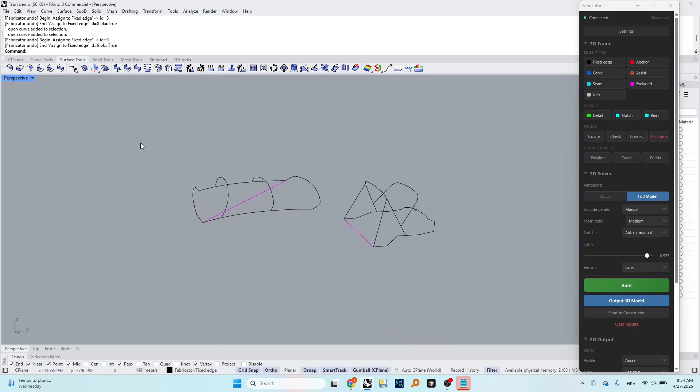Hi everyone, we're going to do another video about wireframes, and this one we're going to use the models that we are familiar with. This is a Bimini and this is a sprayhood. These are not completely done wireframes and you will see why. Well, maybe, some yes, some no.

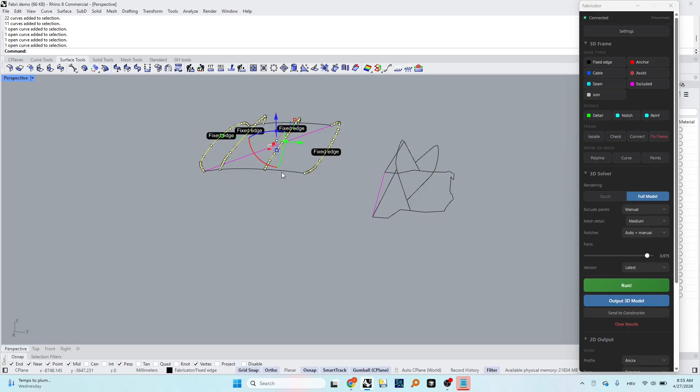You will see for Bimini we have everything made out of fixed edges, which can be done like this. So we have our tubes, these are already seams that are correctly measured on the position where the seams need to be. These are fixed edges, and the sides we also made as fixed edges. So if we run this, yeah, we have this one.

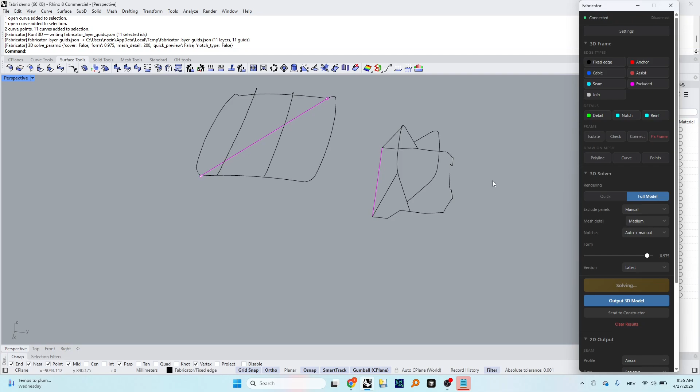The excluded loop would be the bottom loop going all around here. So the bottom one would be the one that we do want to exclude. Let's try to run this, see what we have. Running on medium settings, full model, and we're getting already some result.

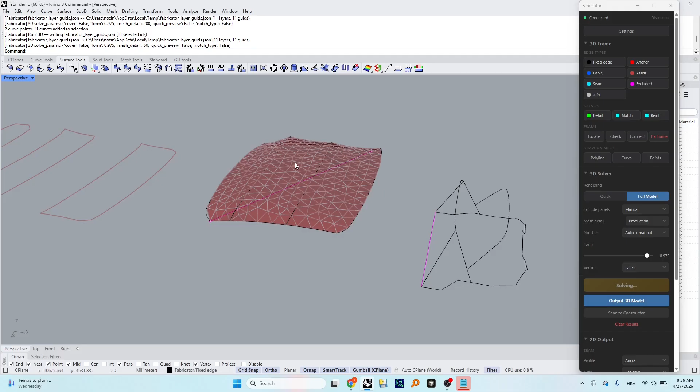Here you can notice that there is a gap, but if you increase the settings, you will get a much better result. So let's put it now to production just to see how it goes. And we wait a little bit longer because it's longer to process on high resolution. And now you can see the model coming out, and this is a decent Bimini.

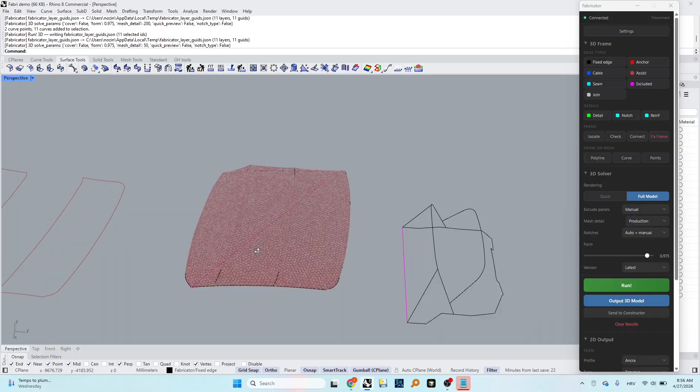You will see a little bit of folding also, settings as default. And here, sides, this is pretty good. It would probably work as it is right now. The panels are out already. Yeah, so nothing wrong with this one.

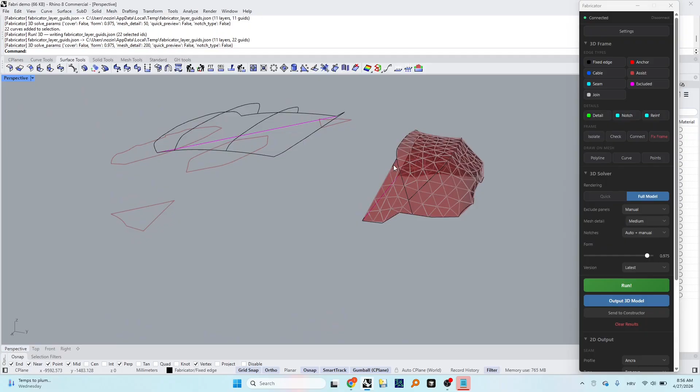Let me just go to medium, and let's go with sprayhood. Let's try to run this wireframe and let's see what we have. So we have also the outer perimeters and tubes, everything set as fixed edges, and poof, we get the result, but we can notice the front is bulging out.

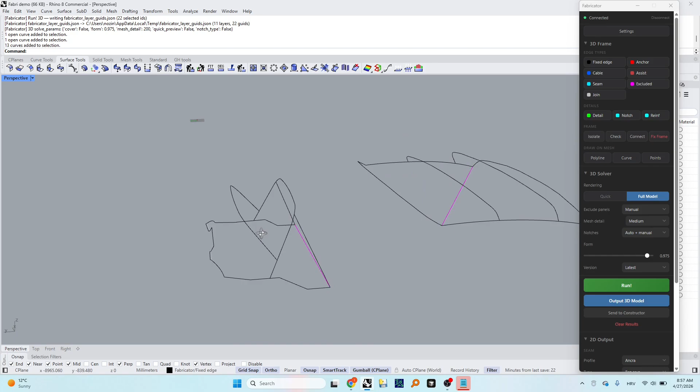And this is where assist lines come in. When we really look at this loop, it's going to be this, just trace this outer edge, the black one here. This is a very difficult surface to automatically do correctly. So there's underlying algorithms that are trying to create this surface only out of these edges that exist here.

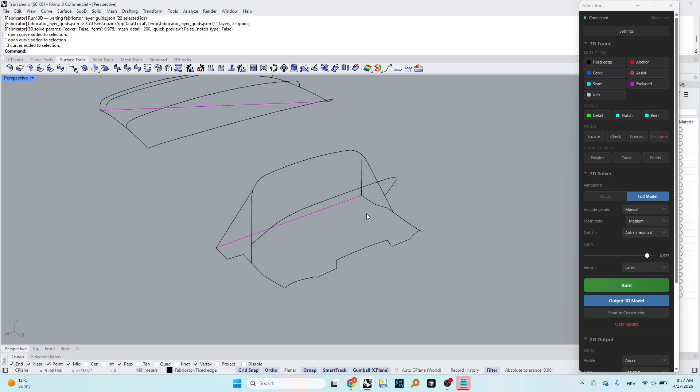So when we have a bulge like that, this is because the underlying calculation is a little bit off. It's not completely accurately reproducing the windshield of the spray hood that we want. So this is where we use assist lines, and just as the name says, we're using these lines to help the algorithm create a better surface.

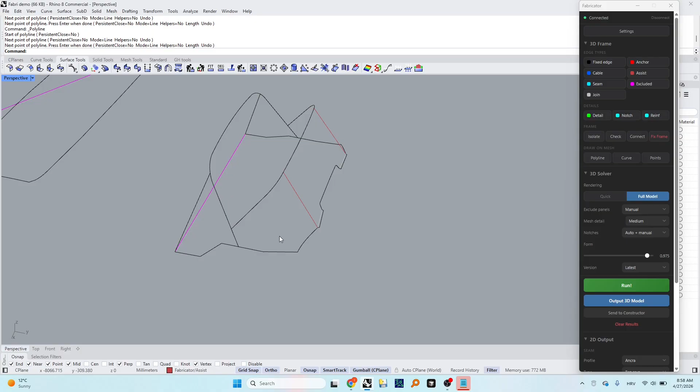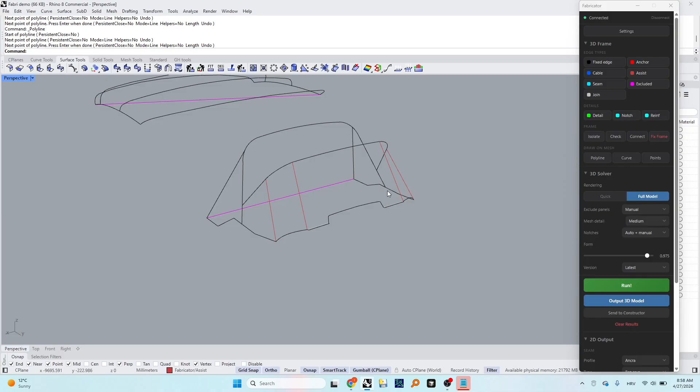So if we just put it here, what we'll do essentially, we can put maybe one more here like that. So essentially what we're doing is splitting this big front loop into smaller loops. So this will become one loop, this will become another, this will become another, but they will be treated as a single one when it comes to form finding and to what our output is going to be.

So these are going to be like they're not even here, they're just helping us create this front surface. And that's an assist line. So when we run this, you will see that there will be no bulge here. We'll get a nice front windshield. And there we go.

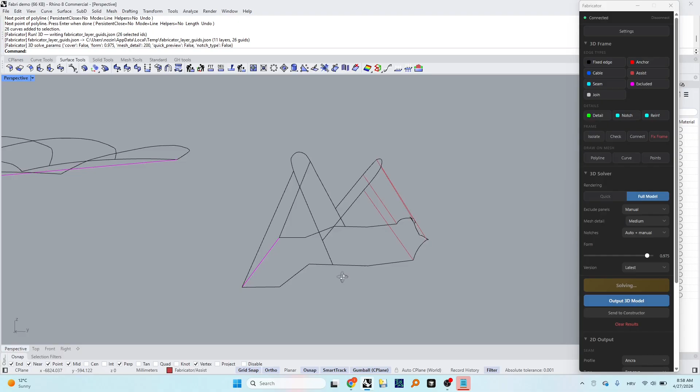You can see these details here, they're coming across, and this is again because we're running this on low detail. If we run this on a production level, it will be much better. So yeah, these assist lines are only doing that.

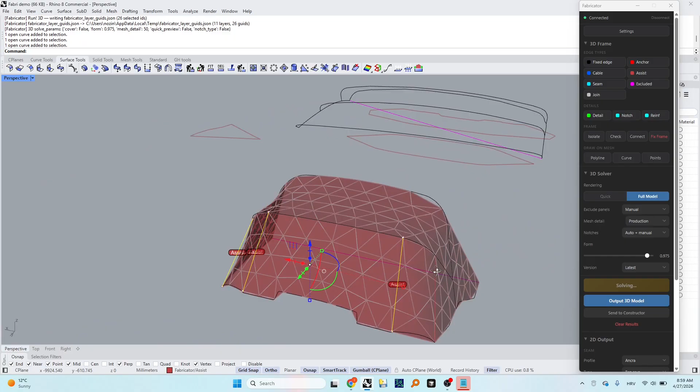They're helping you create the better surface in the front, and you can use this in many cases. Here we go, it's coming out now. For example, here also, you will see that it's leaking out. So what you can do is put one assist line here and here.

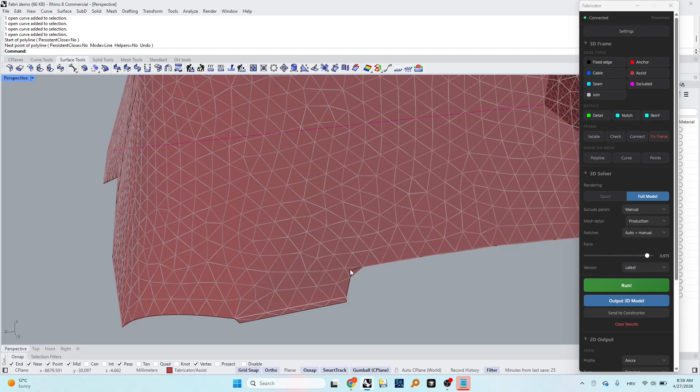Let's see if that will work. You can just help this make it a little bit more detailed, get rid of that triangle in the corner. Let's try.

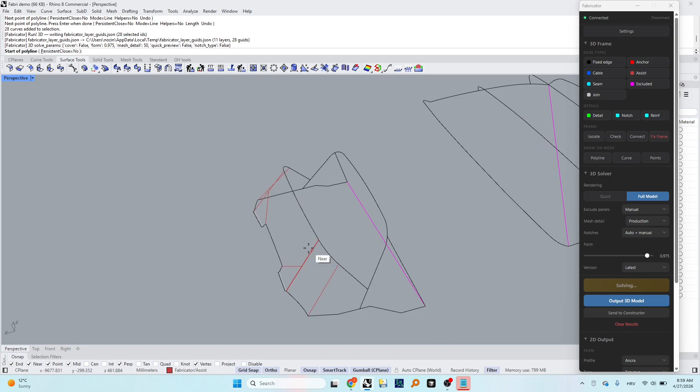And this means you can basically put these anywhere. It will happen sometimes on spray hoods, it happens on the roof as well. So what we do here, we go... and now you can see this kink here is almost gone completely. This is pretty good, more than good enough for production.

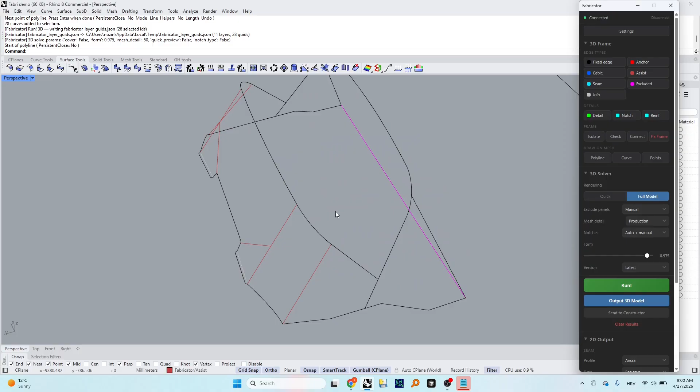Clear this. So yeah, you can put this also here like that, nothing wrong with it. It will help create the roof a little bit smoother. We don't need it right now, but just so you know that it's there.

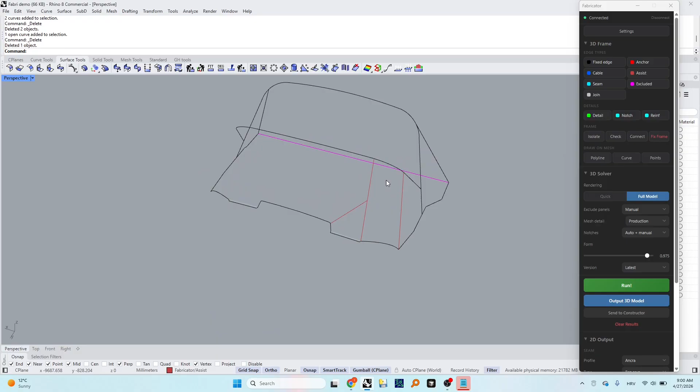Okay, so back to spray hood. We'll do just one little detail here to show you how to do it better. We don't really need to use these because on spray hood, well, if you want to do spray hood in one piece, but where I'm from, we usually put zippers here, so I would use a seam here.

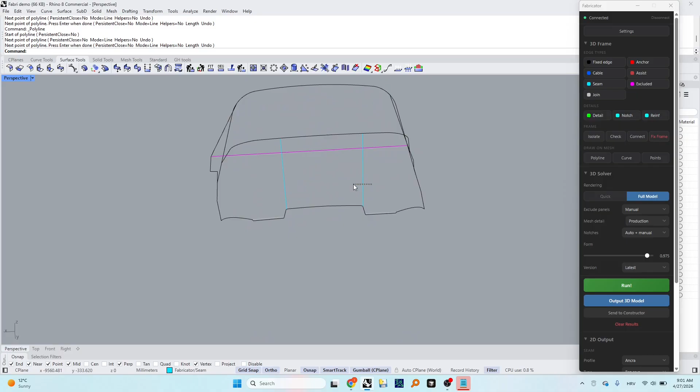I would use a seam here. You can also use cable, you will get exactly the same result. Let's see what we get now.

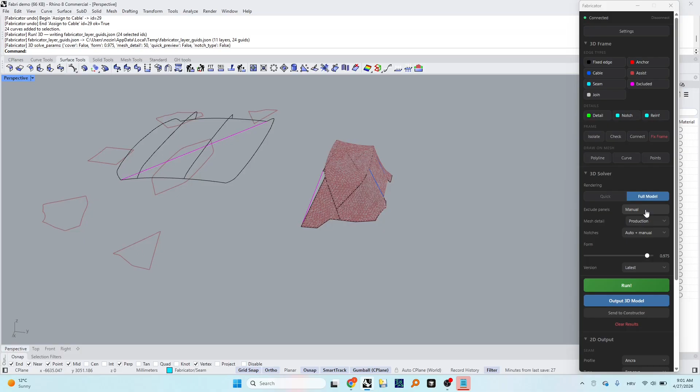Maybe I would move these a little bit inwards, but it's fine for our purposes right now. Oh, we're in the production level. Okay, yeah, all right, so you can see here that this is also getting too much inwards.

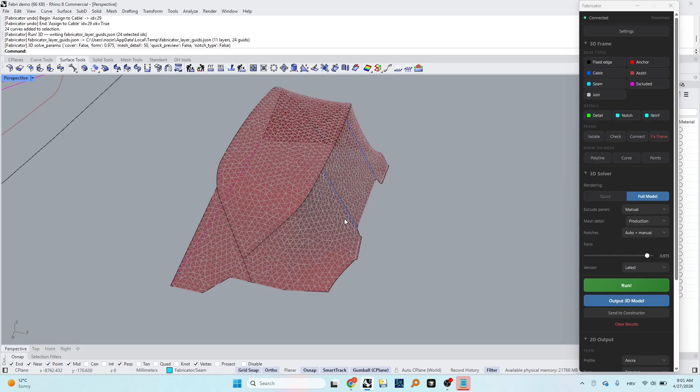Look at this, you need to visually inspect what you get, because on weird shapes like this it will be a problem. It can be a problem. So what you need to do is...

I'll just split this and put one assist here. Let's clear this. Maybe just split it in half.

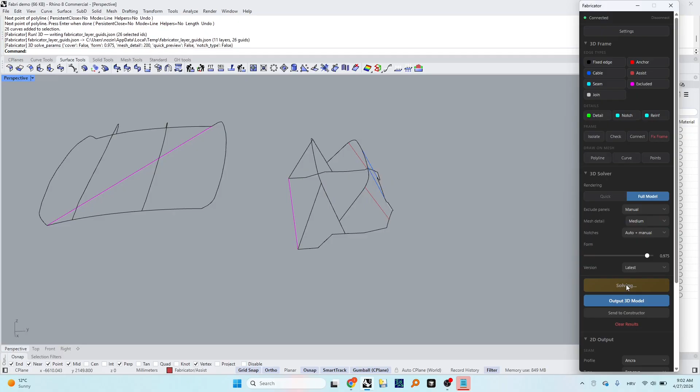And if we run it, let's put it to medium processing. Here we go. This is going to be now a much better shape, coming out is going to be all the pieces.

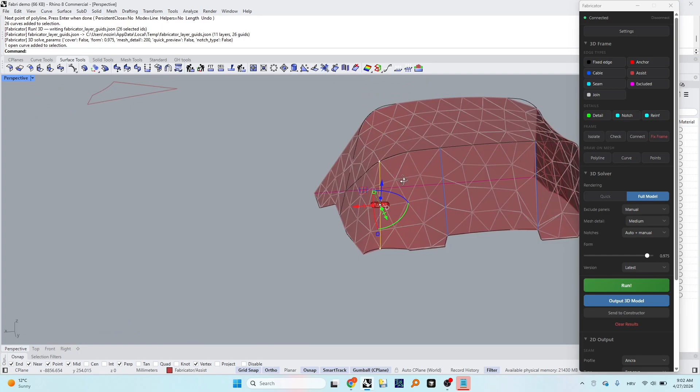But from my experience, what is better to do here, just like now, and since we're doing a spray hood, you can put a seam here and then stitch them together and then sew in the window. You'll get a little bit better shape of spray hood.

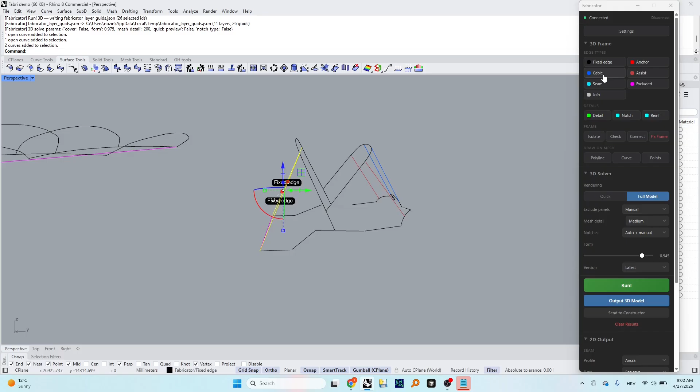Okay, so what else can we do here? We can try cranking up a little bit the form. And these two, we can put it as a cable, and this is going to be our wings. Let's put it high.

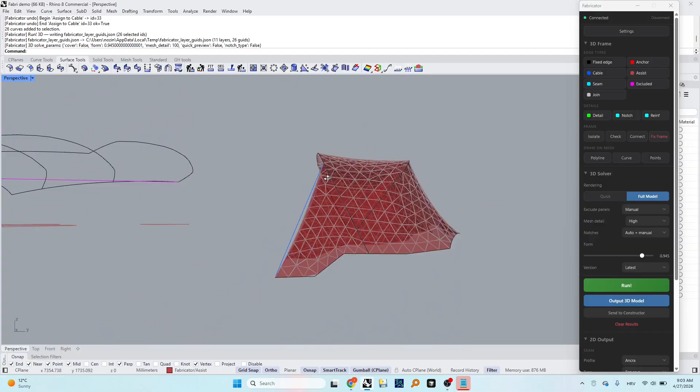All right, and now you can see there's some hollowing in the wings, they're acting as a shade sail. Here we're getting a lot of hollowing in this corner, but it is going to be like this when you apply a lot of tension.

And I'm telling you, if you put a seam over here and then connect, like, let's change these two to seams.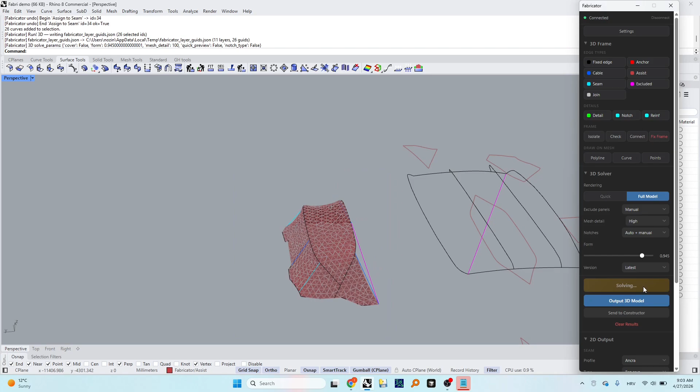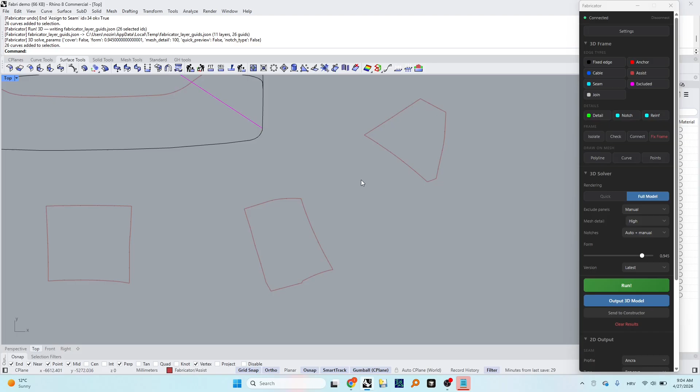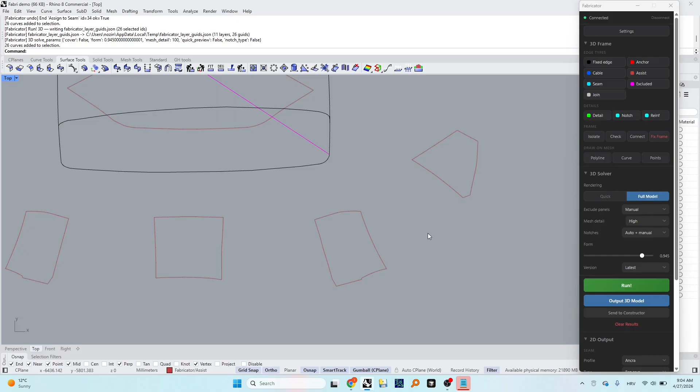And yeah, this is going to come out, this is going to come out curved. So what I would do is connect these two and then sew in the window, cut out the material, and you basically get a panel with a built-in dart inside. And you would get this nice curvature.

All right, so this concludes the simple wireframe using the spray hood and bimini as example, and the use of seam lines.